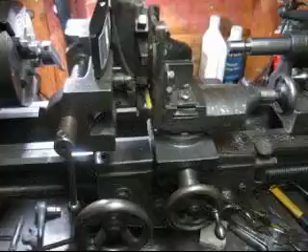Well, this is Tom again. I'm going to call this a Frankenvise. I wound up getting this thing off eBay. Let me loosen it up so I can spin it around and I'll show you a little better.

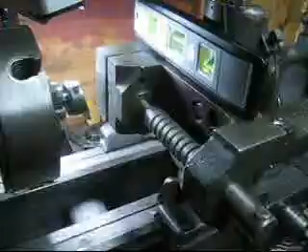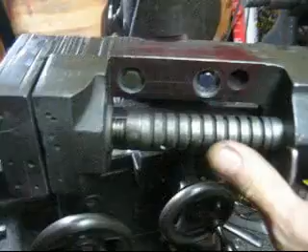This is an old milling vise. It's called a quick change, I think, a quick release or something like that. But you see this bracket right here, it goes in these slots. So in order to loosen it up, you only have to loosen just a little bit here, and then this little lever comes out, and then you can pull the vise back.

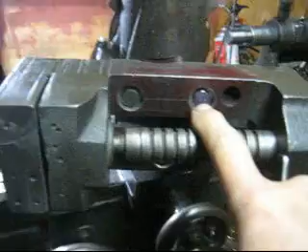But this was a 3-inch one, apparently used for a bandsaw. It was cut up pretty good along in here, but it was plenty heavy. So all I did here was drill out some bolts. It was kind of a difficult thing marking this cross slide. I drilled some bolt holes in it here, and then I used a big cutter, milling head, and I put it in the drill press, and the lathe, and countersunk it so I could put these bolts in.

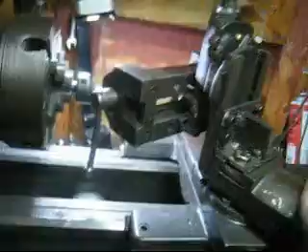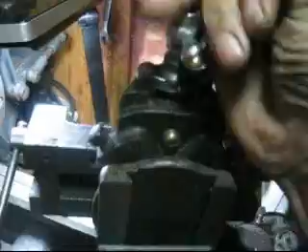And what I was trying to do on the thing, it's kind of hard to move it one-handed, but this cross slide that I'd had, inside this cover is kind of hollow. You can see where the bolt's going through here, and what I tried to do was get it into part of the way here. Let me see if I can back this up a little bit. I've got it locked down pretty tight to try to mill with it, but you can see the ways right here.

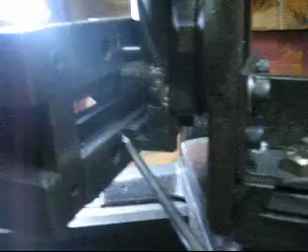There was really no good place to put a bolt through. They weren't designed for that, because we've got the V in it right there, and so the bolt is just barely clearing the V, and it's going through the edge of the slide with the biggest part. And similarly, on this part right here, I wanted to try to set this inside of the vise. I had no idea how big it was going to be, as far down here as I could, and still get it low enough to mill something below this.

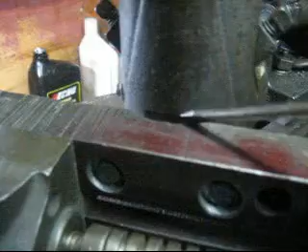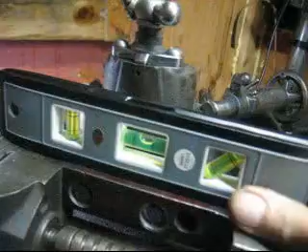So basically I got one good one in this thick part of the bottom here, one good bolt here, and then one on each side. And I just guessed the middle here with a grinder, and I ground a little bit out so it would clear this part, and I milled this back. But anyway, I've got the vise on there, and I do have a degree thing on the other side. It's a little hard to read, but for now all I did was just throw a level on it. Strangely enough, it is level all the way around, and this is enough to just basically center the vise.

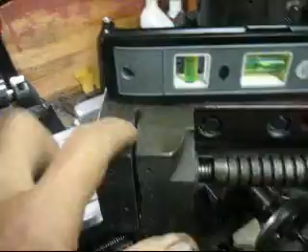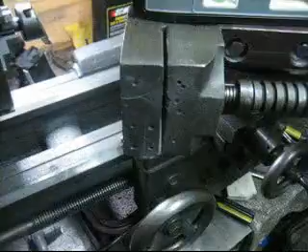What I was trying to do now was level up or even up the surfaces of the vise. Now, down here in the bottom, it's not really square. This is about as close as it's going to get. This had some jaws in it, which I don't have, and if you'll look at this part right here, you can see there's quite a bit of room in here. This is nowhere near straight across. You can see how my little scale hooks on it right there.

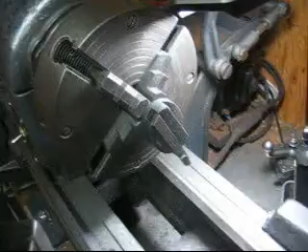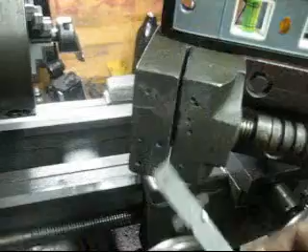And so I stuck a fly cutter in the lathe, and I was just trying to machine this thing off so I can get this flat. Then I was going to make a couple jaws and drill them and bolt them in there. But I found out some things here. This is pretty obvious, I'm 6 or 7 inches away from my cutting surface off of this dovetail here on the feed screw. It's just too far away. When it's running, I can actually see this thing moving a little bit, even though I can't move it by hand really. But when it gets hit with that fly cutter, it does move.

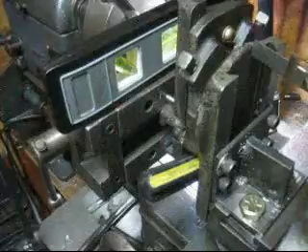One of the things I found to improve it is I've got a pretty good gap in here. Of course, it's only going to be here when it's in the lowest position like this, but I just took a plastic screwdriver and tapped it in here to make this more solid, and that improved it some. But I think really, to do this right, I thought this was going to be plenty strong, but I need to make it all out of this 3/8, well, not quite 3/8, a size under 3/8, and run it all the way up to the top here to make this as strong as possible.

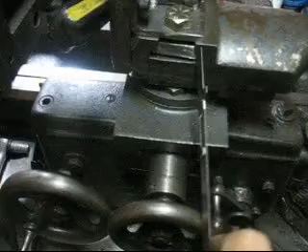I may just put one more plate like this out of this heavy stuff right here, put 2 more bolts in it, and then cut a triangular piece like that and weld that in. Probably this as well, instead of only just barely clearing this edge of this way here. It should probably be way back here, so I should have made this piece much bigger. Ideally, it would go from here to here, and that'll give me as much rigidity as I could possibly get in it.

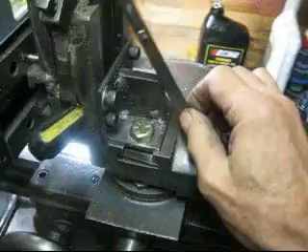I don't know. I basically, that means I have to junk this piece, and it took me quite a while to make this, but I didn't realize this vise was going to be this big, really. It's a 3-inch vise, and I was just assuming that it wasn't that big, but it must weigh 7 or 8 pounds. It's pretty heavy.

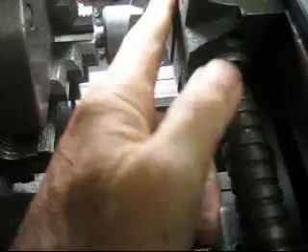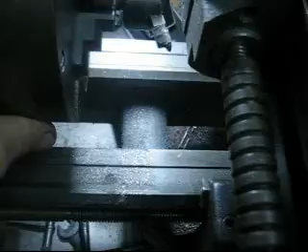The next part of this is this thing is really banging away. It took me forever to try to mill off this little piece of the vise, a few thousandths at a time. And what I've got here in this fly cutter is a carbide tip bit. These things were, I bought 3 of them in some kind of a little set. One of them, the smallest one, was missing a bit.

This one had a carbide cutter in them, and I think I showed on an earlier video when I was machining this plate back here flat. I tried to sharpen this, and I had some success, but now that I'm actually cutting something out here that's a little heavier and I've got all this flex in it, that's not working out. Let me pull that bit out of there and I'll show you something.

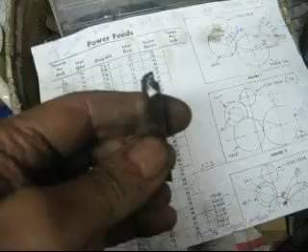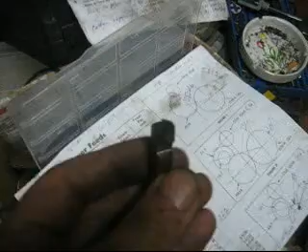Anyway, here's the bit. It's pretty chewed up. Looks like it's been ran into some stuff. If I was to use this for a lathe bit, I would say that that angle's way too steep. A lot of relief on the end, but it just really don't look too sharp, and I don't know, I'm not having any luck with it. It's cutting, but it's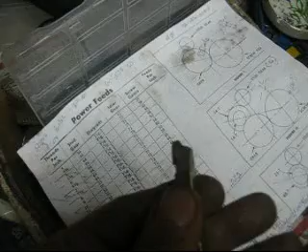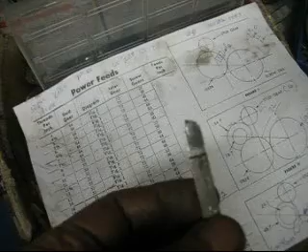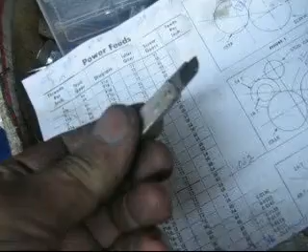really slow. So I looked on YouTube and I saw some videos on how to grind a fly cutter bit, so I'm going to try to grind one and try it. I learned something here. Apparently you can't grind carbide. It does a good job of chewing up your grinding wheel, but I was able to start touching it a little with a

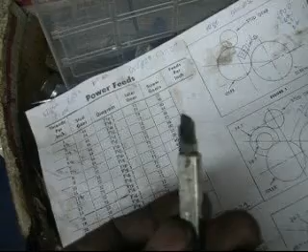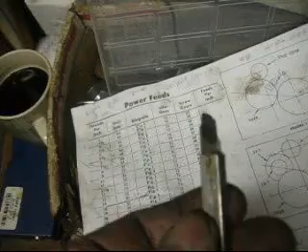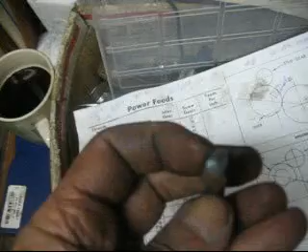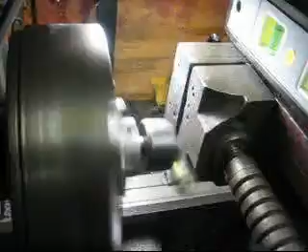cutoff tool. Problem was that it had no relief. It had a negative relief, so the back side of the tool was hitting before the cutter side. I managed to get most of it off. I don't know if I've got enough to make any difference, but I'm going to give it a try and see. You know, it's working a lot better. You can see the cut there. Nowhere near the amount of banging that was going on. I've still got some in here, of course, but

so I'm going to try, I'm going to give this about 2,000. Cutting. I can see a lot of the metal's coming off. Seems to be pretty smooth. It's not bouncing around near as much as it was before. But it seems to be taking off a pretty clean cut all the way across there. So it looks like that was probably a good thing. You see on this side of the cutter what it's doing when it comes over here.

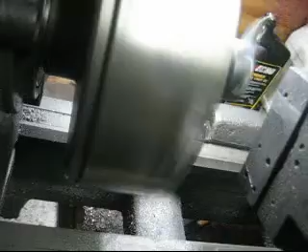So that's pretty much it. I'm going to take out here down the other, where the other side of the cutter starts hitting. Bit more of a cut, but it's even all the way across the face. Much of anything other than make a noise. So yeah, when I use standard milling on it, I'm pulling it against the cutting side right now. Just taking off that top corner. I'm doing a pretty fair job. A little bit of a spring cut. Every time it's just taking a little more. I don't know how much, but not much.

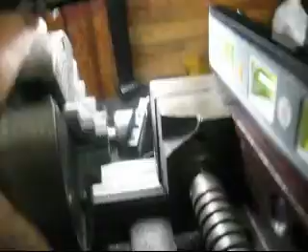So my partial sharpening on carbide, I don't have another piece of drill bit that thick or that size. And I can see there I still got, I don't know what the term is, negative positive rake, but the cutter's hitting, but as well the trailing edge isn't far behind it. I'd like to have more clearance than that. But anyway, it all seems to work out pretty good here.

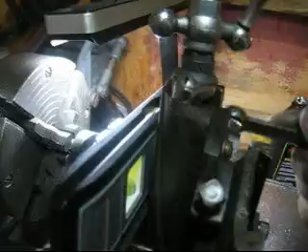Unfortunately, to change my vise, I gotta loosen it up here. I tried to put it in the middle, but I'm gonna pull it up here to where I can get that bottom part of the vise if it hasn't been cut, and then just come back over here, lock this real good. And I should be good to go here.

Back across here, make sure I'm not hitting. Yeah, that bottom side of the vise is low. I'll just dial it in until I get some contact. That might have been 5 thousandths. Yeah, it's still sitting up here in the middle of the part, so I'm getting pretty close to being the same thickness all the way across. Take off a couple thousandths here.

Yeah, it's cutting pretty good right there in the bottom. So according to this, it looks like I've got it pretty square with everything. And it's cutting a pretty decent surface across the face of the vise. Of course, this vise is cast iron, so it's easy to cut. Yeah, so bring it on as far as I can go this way on it. That bottom half of the vise is pretty good.

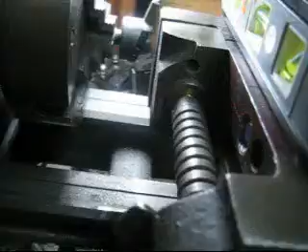Now just to make sure that I got it right, I'll loosen this up again. And I'm just going to rotate the vise down here to where the cutter will contact the top. That's plenty right there. And I'll just tighten that up again. I found out that everything's got to be really tight in this setup. And get back over here where I'll do some standard milling instead of climb milling.

Something must have loosened up. No. So that's taking a lot more out there. You can see it flex now. See, the oil down in there is really moving around. I didn't change anything, but apparently that's way too much when I rotated it. So I'll just back it off a little and see what's happening here. That's approximately half as much as was taken off before.

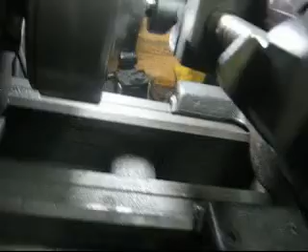Why it would have changed that much just rotating it, but take another couple thousandths here. About where it was when it was hitting. I was just trying to take too much. And mostly it's taking some down there on the bottom. And it tells me I might not have this thing lined up. Climb milling here. Back the other way. Just taking it off the top, leaving the bottom alone.

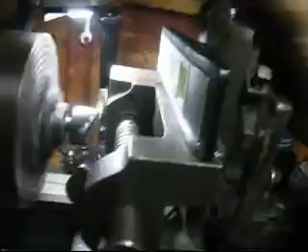Anyway, even though it feels good and solid and looks good, apparently when you take a pretty big cut on it, a lot of this stuff starts to flex, which I'm really not surprised, you know, with that Frankenstein setup I got. I can probably back this up. I've got it back as far as I can, but there's really no cure for that.

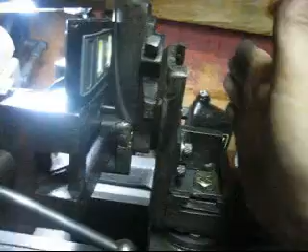I don't know what the wear is going to be on this, trying to put on that much effort, but like I said, I think I'm going to make some kind of a massive brace in here. Maybe I'll just put another piece of this 3/8 steel across here like this. Put another heavy plate in here. The reason I didn't bore into this is because the slide is here, but I think I can take it up here to the edges, about in here where I got some meat. Put another big piece. Put another piece up here, and then weld this together.

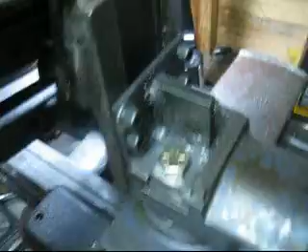So it's still going to be good here on the bottom on the slide, but I'm pretty sure that this is the main problem. I didn't really realize when I was making this how high it was going to be. Anyway, I'll give you another little update on this as I'm coming along. The surface on this is really not bad. You see, I need to take a little more off the bottom.

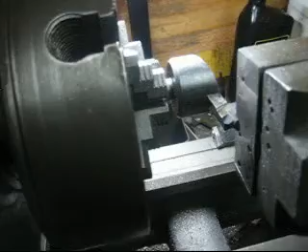My problem is having to rotate this vise around in order to get the top and the bottom. Of course, if I had a longer bit that stuck out farther, I'd be able to get the whole thing in one go. I may wind up doing that, but right now I only got that one bit, and I know it's not sharp enough. I've got another piece of tool steel that I may have to try to grind down to fit that and make another good cutter, and I'm sure that'll be about 90% of my problems.

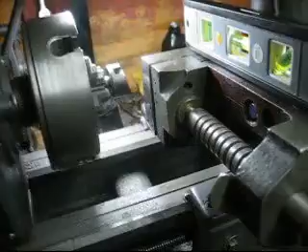And like I say, this brace on the back, and again, this is probably worst case scenario, trying to fly cut this high. I did put the cutter in a 4-jaw chuck and center it. So anyway, there's Frankenvise, and I think that, not exactly what I hoped it would be, but it'll for sure enable me to mill keyways and some things like that.

It's not very big, and I'm not taking such a huge surface cut on, so maybe a day's work doing all that, and I probably got another day's work of fooling around and figuring out some bracing on it. Anyway, I'll update the bracing, and I'll probably post another video when I get this thing done.